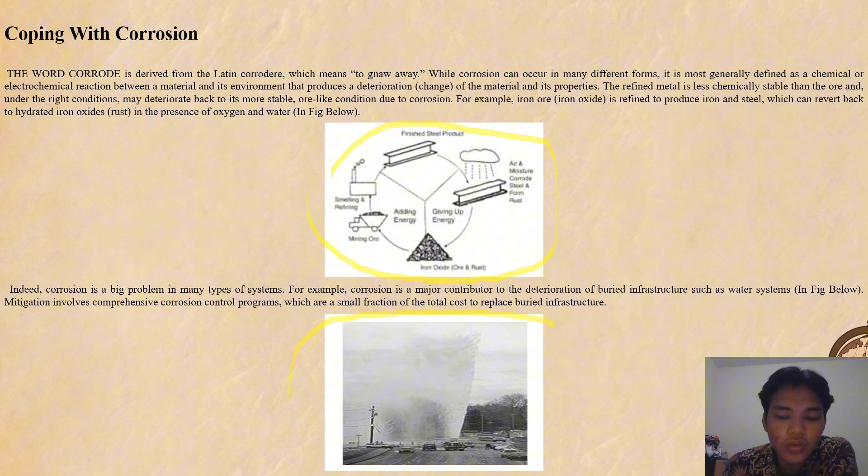Indeed, corrosion is a big problem in many types of systems. For example, corrosion is a major contributor to the deterioration of buried infrastructure, such as water systems, as shown in the picture below. Mitigation involves comprehensive corrosion control programs, which are a small fraction of the total cost to replace buried infrastructure.

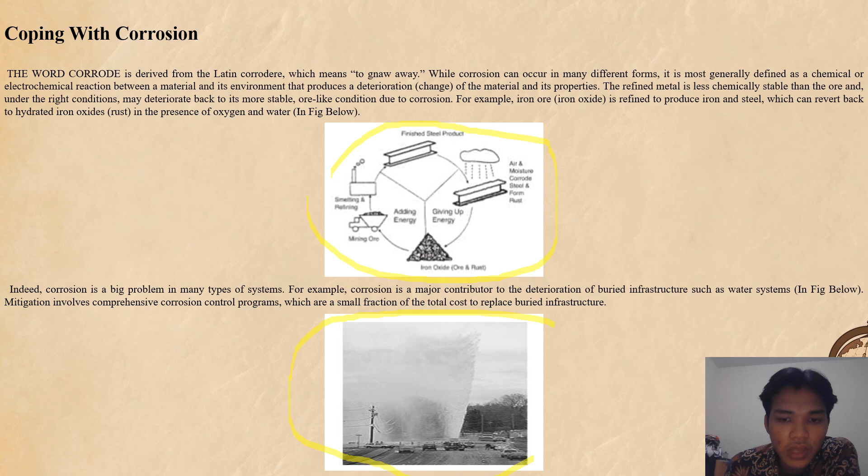The mechanisms of corrosion. Metal corrosion involves a branch of chemistry called electrochemistry, which is the study of two basic types of reactions: chemical changes that produce electrical current flow, and conversely, electrical currents that cause chemical change. Electrochemical processes require both oxidation and reduction reactions in order to maintain the conservation of electrical charge.

This process occurs in electrochemical cells, which consist of an anode and a cathode immersed in an electrolyte or general chemical surroundings. Metal corrosion is basically the electrochemical process of oxidation and reduction, as shown in the picture below. Oxidation occurs at a site on the metal surface where metal atoms dislodge from the solid and enter the environment or solution as a positive ion or cation.

Corrosion cells and batteries. Both oxidation and reduction reactions must take place for corrosion to occur. During metal corrosion, areas over which the anodic and cathodic reactions occur may vary greatly, from areas a few atoms apart to areas extending to hundreds of square meters.

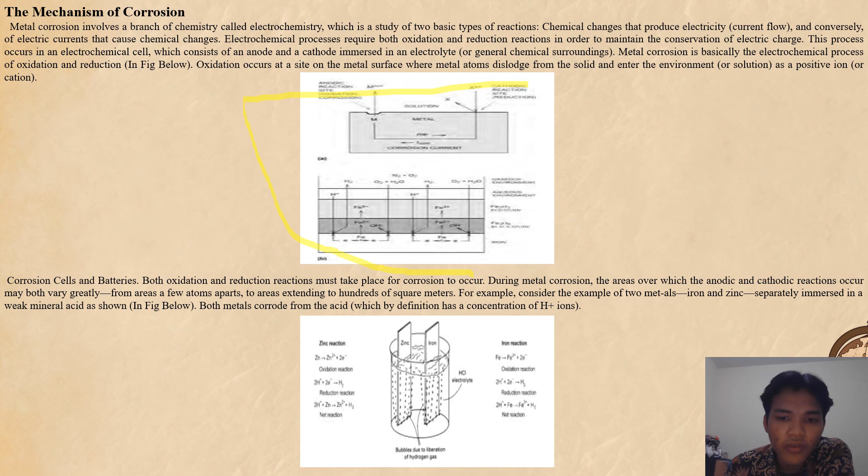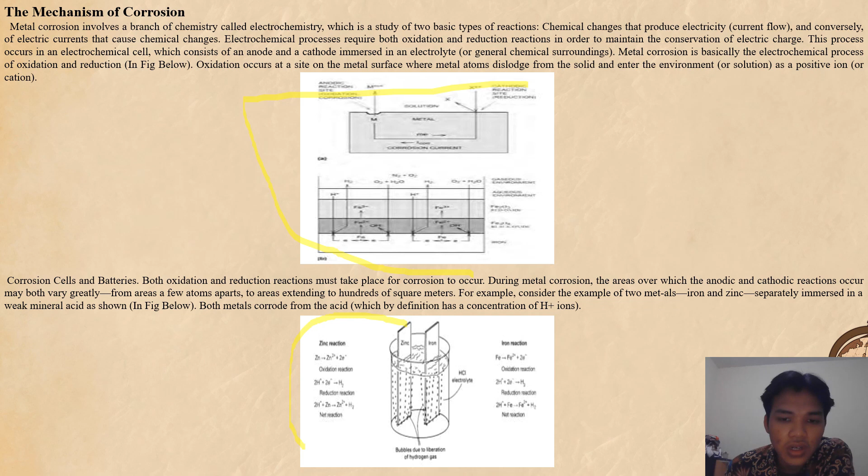For example, consider two metals, iron and zinc, separately immersed in a weak mineral acid solution, as shown in the picture below. Both metals corrode from the acid, which by definition contains a concentration of H+ ions.

However, if the two metals are immersed in the same acid and electrically connected, as shown in the picture below, an important change occurs. The oxidation reaction of zinc in hydrochloric acid is stronger than that of iron, which means more electrons move to the zinc electrode than the iron electrode. That is, the electric potential or voltage of the zinc electrode becomes more negative relative to the iron.

Galvanic series. This also introduces the concept of the oxidizing power or potential of different metals. The oxidizing power of a metal is its ability to build up voltage or electromotive force from the removal or addition of electrons by the electrochemical process of oxidation or reduction.

Passivity. Essentially, passivity refers to the loss of chemical reactivity experienced by certain metals and alloys under particular environmental conditions. Passivity, although difficult to define precisely, can be quantitatively described by characterizing the behavior of metals that show this unusual effect.

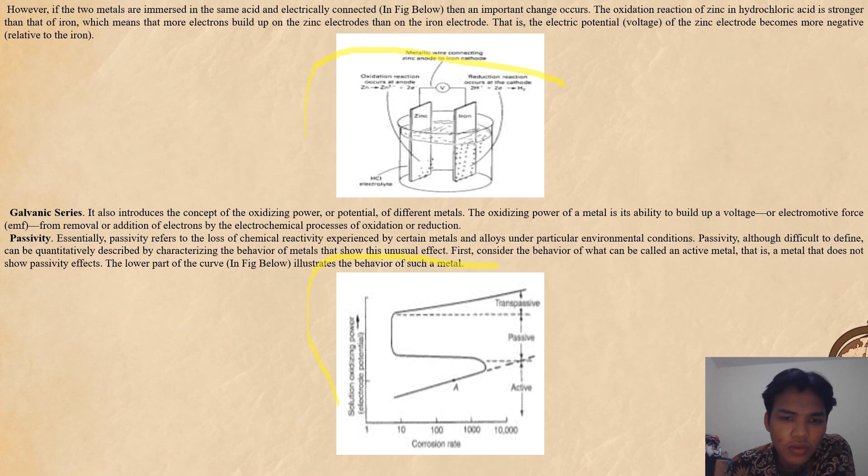First, consider the behavior of what can be called an active metal, that is, a metal that doesn't show passive effects. The lower part of the curve in the picture below illustrates the behavior of such a metal.

Forms of corrosion. During metal corrosion, the areas over which the anodic and cathodic reactions occur can vary greatly. This results in various forms of corrosion such as uniform attack, pitting, and crevice corrosion, as shown in the picture below. The small corrosion cells are essentially short-circuited galvanic cells, as shown in the picture below.

Pitting and crevice corrosion are forms of localized corrosion that are significant causes of component failure in metal parts. These forms of corrosion can occur on passive metals or otherwise protected materials. Uniform corrosion is a corrosion process exhibiting uniform thinning that proceeds without appreciable localized attack.

Intergranular or intercrystalline corrosion is the preferential dissolution of the anodic component, the grain boundary, or the zones immediately adjacent to it, with little or negligible attack on the main body of the grains.

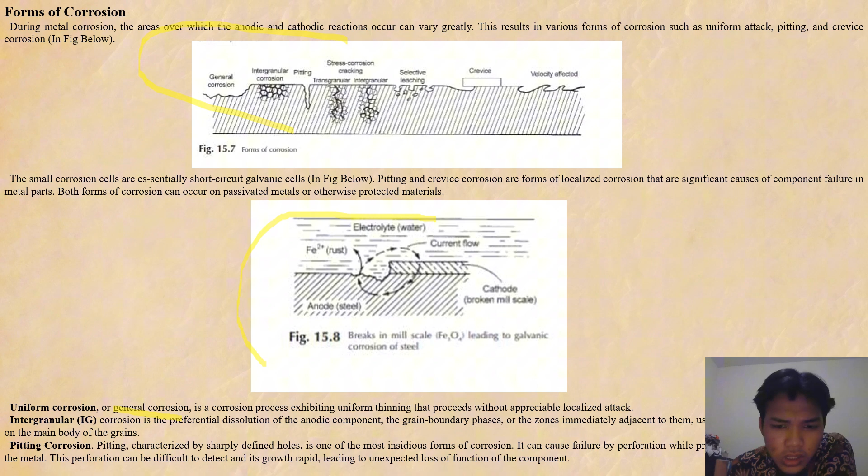Crevice corrosion is pitting that occurs in narrow gaps and at metal-to-metal or metal-to-nonmetal interfaces. The mechanism is the development of a concentration cell. An example of this corrosion with type 304 stainless steel is shown in the picture below.

Stress corrosion cracking, or SCC, is defined as cracking under the combined action of corrosion and tensile stress. Stress may be applied externally or internally. A classic example of SCC is shown in the picture below: failure of the brass cartridge case was due to what is sometimes called season cracking.

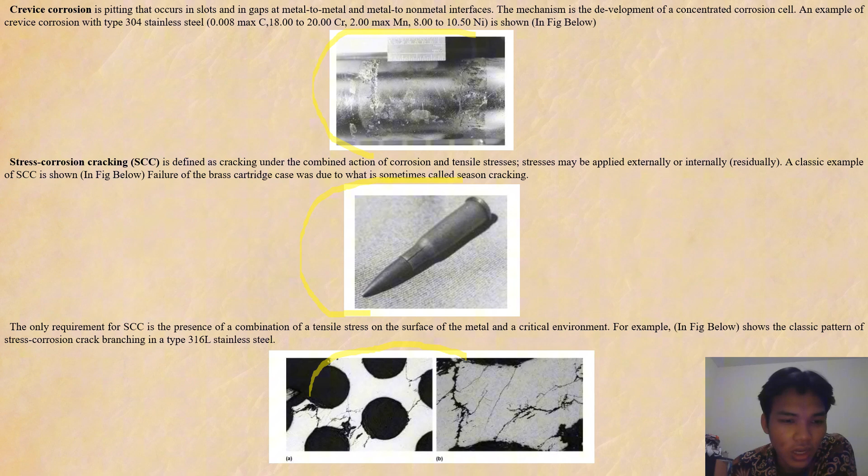The only requirement for SCC is the presence of a combination of tensile stress on the surface of the metal and a critical environment. For example, the image shows the classic pattern of stress corrosion cracking in type 316L stainless steel.

Selective leaching: in selective leaching, an element is removed from an alloy by corrosion. The most common example is dezincification, or the selective leaching of zinc from brass.

Stray current corrosion is an electrochemical process. Corrosion can be influenced by electric potential. Stray current or stray current electrochemical corrosion is different from natural corrosion because it is caused by an externally induced electrical current, and is basically independent of factors such as oxygen concentration and pH.

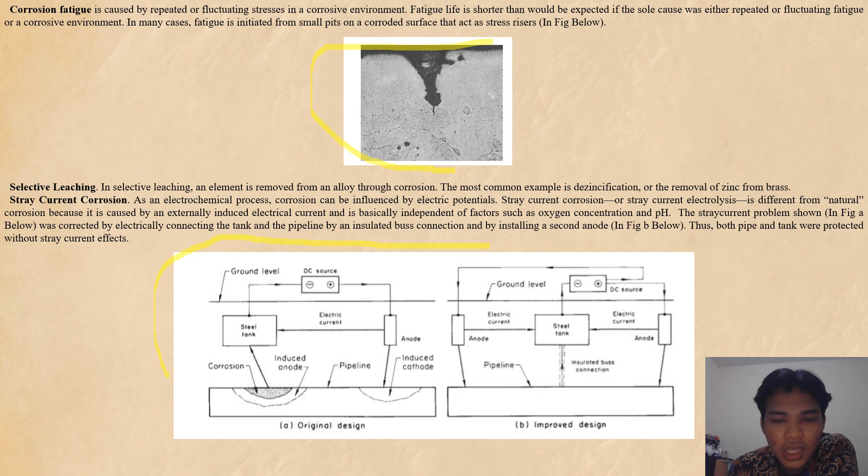The stray current problem shown in the picture below was corrected by electrically connecting the tank and pipelines with an insulated buss connection, and by installing a sacrificial anode, as shown in picture B. This eliminated the stray current effects on the tank.

Corrosion prevention or mitigation: although corrosion is a chemically favorable process, it can be stopped by countering the oxidation reaction of an electrical cell. The difficulty lies in its complexity. For example, controlling the corrosion-prone condition of metallic pipeline networks requires an understanding of various failure conditions, such as soil types, pH, stray current effects, and electrical continuity.

Corrosion inhibitors: a corrosion inhibitor is a substance that, when added in small amounts to a corrosive medium, reduces its corrosivity in an aqueous system. Chemical treatment with inhibitors can be used for corrosion control in aqueous environments.

Inhibitors are defined as a chemical substance or combination of substances that, when present in the environment, prevent or reduce corrosion without significant reaction with the components of the environment. An example of this principle is the use of antifreeze in cars. Cooling systems contain dissimilar metals such as brass, iron, aluminum, copper, solder, tin, lead, and steel.

Cathodic protection: the two types of cathodic protection are sacrificial anodic protection and impressed current protection. The pairing of zinc and iron in acid is an example of cathodic protection with a sacrificial anode. Anodic protection is based on the phenomenon of passivity. A limited number of metals, such as stainless steel, can achieve passivity. Anodic protection requires that the potential of the metal be controlled.